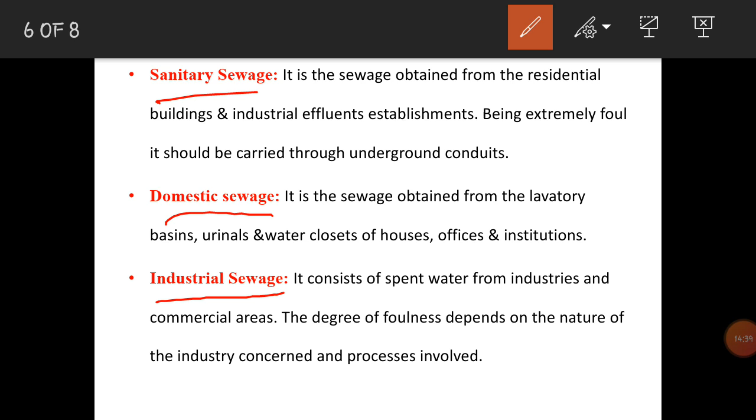So these are some of the few definitions, and next comes the sewers. Sewers are the underground pipes which carry the sewage to a point of disposal, whereas sewerage, the entire system of collecting, carrying, and disposal of sewage through sewers, is known as sewerage.

The last term is bacteria. So bacteria are nothing but microscopic organisms. The following are the groups of bacteria: aerobic bacteria, anaerobic bacteria, and facultative bacteria. Aerobic bacteria require oxygen and light for their survival. Anaerobic bacteria are those bacteria that do not require free oxygen and light for survival.

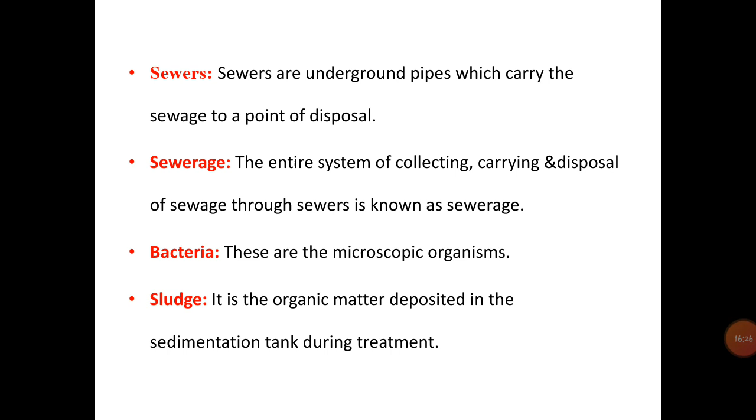Facultative bacteria. So these types of bacteria can exist in the presence or absence of oxygen. They grow more in absence of air. So these are the different types of bacteria, that is aerobic bacteria, anaerobic bacteria, and facultative bacteria. So the next term which we are going to discuss now is sludge.

Sludge is nothing but the organic matter deposited in the sedimentation tank during the treatment. Sedimentation tank is the tank which is provided in order to sediment the particles. So there are different stages of purification of wastewater, in which the sedimentation tank helps the particles to sediment at the bottom of the tank, and later the sediment particles will be disposed of, or they can be used as fertilizers in the fields.

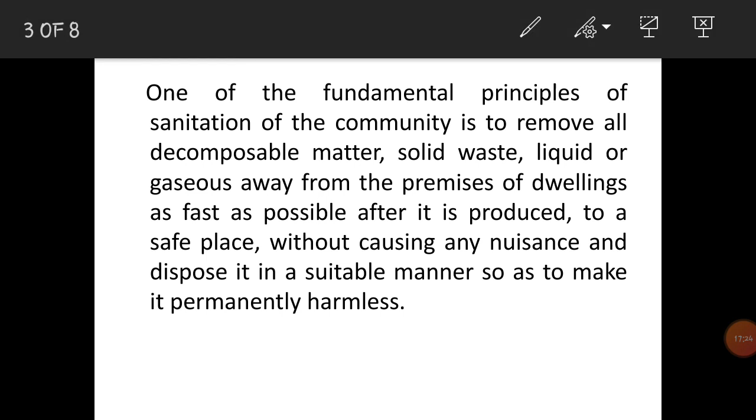So this is regarding today's session. Now let us recall the things which we have discussed in today's lecture session. So in the first part we discussed the necessity of sanitation. So what is sanitation and why is sanitation necessary? Because we know that different communities dispose of different types of wastes, and regarding the different types of waste, we have already discussed that there are numerous types of waste which are classified like sewage, sludge, stormwater, sewerage, and so on.

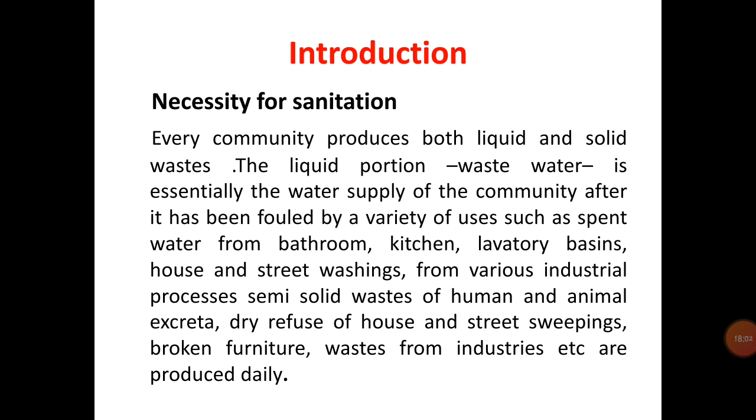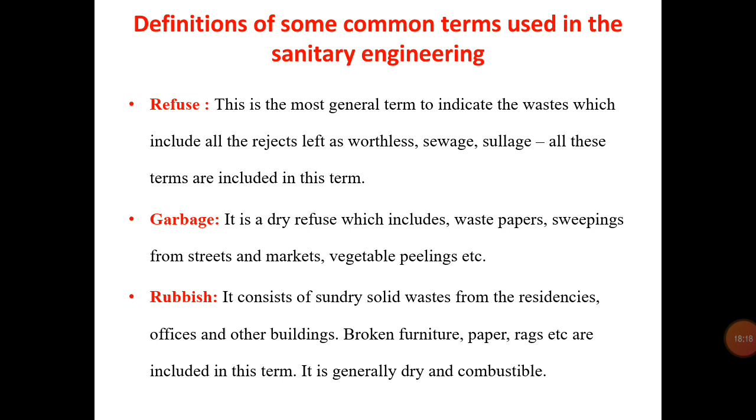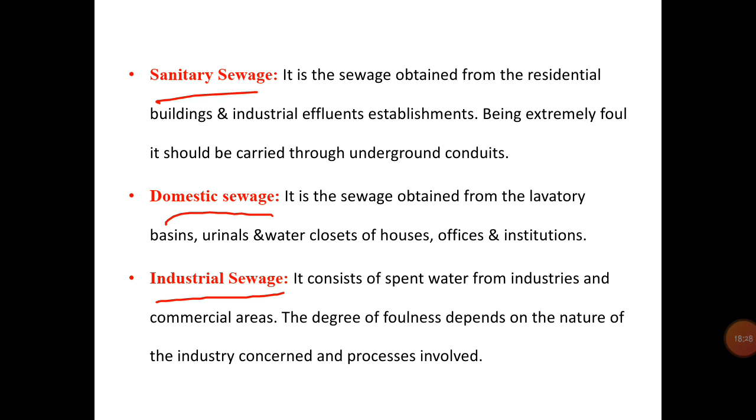So the importance of the sewerage system we have discussed briefly, and these are the definitions. The definitions are refuse, garbage, rubbish, sullage, sewage, stormwater, sanitary sewage, domestic sewage, industrial sewage, sewers, sewerage, bacteria, and sludge. So these are the different definitions which they are going to ask you in the examination. So my dear students, it is very difficult to remember these definitions, so make sure that you write all the things in a proper way in the examination.

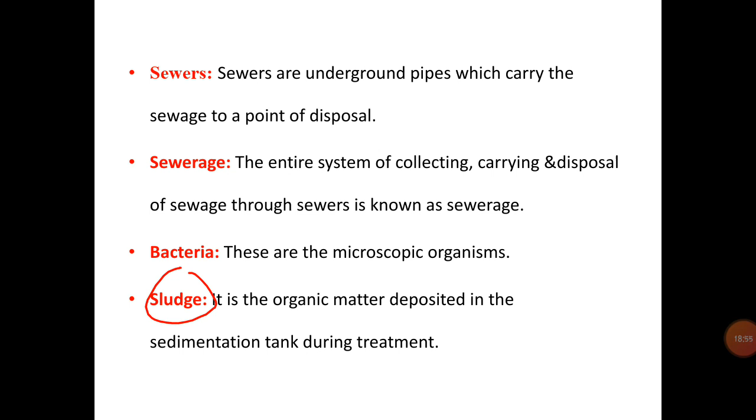So after successful completion of this particular topic, you will be able to define the importance of the sewerage system, you will be able to classify different types of sewage, and you will be able to understand the necessity of the sewage system. So these are the course outcomes of today's covered highlights. In this session you will be able to define the importance of the sewerage system, why it is necessary to provide the sewage system, and secondly you will be able to classify different types of sewage.

We know that there are different types of sewage, in both dry as well as wet conditions, and you'll be able to understand the necessity of the sewage system. So the application of today's topic is to understand the types of sewage systems. And my dear students, the questions for practice as well as for assignments are: explain the types of sewage and what is the necessity of the sewage system. These are the two important questions which are likely to be asked in the examination.